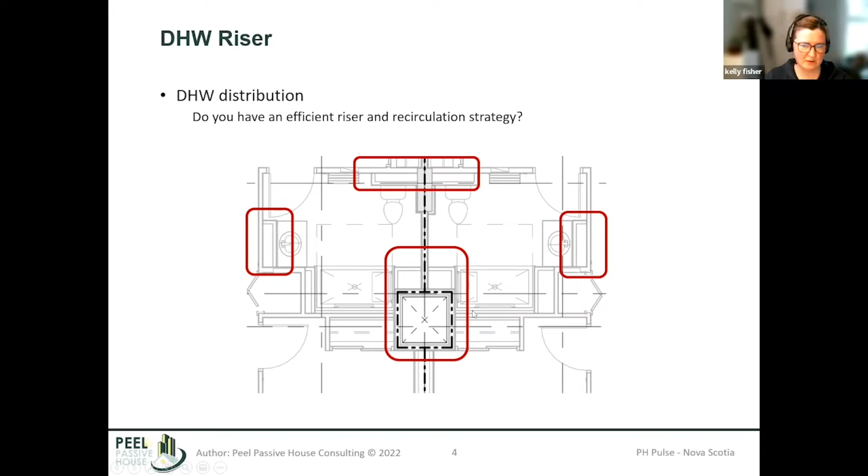There are a lot more things we can do when it comes to efficiency, so we often talk about efficiency in design. Here's a view of a quick SketchUp model I made that shows how we can further improve this - here's an example where we've got suites back to back.

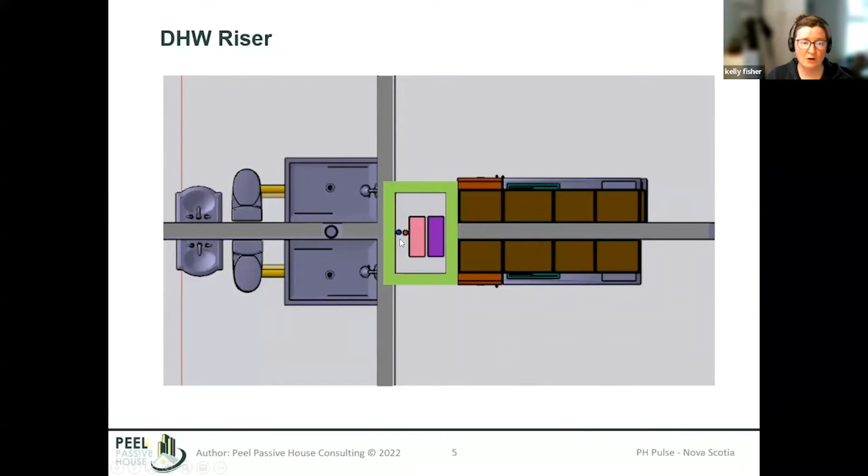We've got a kitchen on each side, a washroom on each side, showers and lavatories, and in the center we've got a shaft. In this mechanical shaft we can do our main distribution - distribution for ventilation and for domestic hot water. When we look at how that could look floor to floor, we can really optimize our distribution network and have far fewer pipes.

When you're looking at ways to save energy, in a passive house we know your space heating demand gets a lot lower. The next energy sink we find is domestic hot water - you've got a lot of pipe heat losses through your distribution system, a whole variety of different things we can look at for efficiencies.

One way we can do this is clustering the systems together to limit the risers in our design. In this example we saw the floor plan back-to-back suites, but we can also stack them vertically. This allows us to simplify our approach and have one hot water riser, for example, that services 8 suites in this situation, which would be a lot more efficient system.

We could save on heat losses, we could save on watts per suite if you wanted to factor that into your domestic hot water load. So there's a lot you can do early on in the design of a project that really helps amplify those efficiencies later on in design if you're tight.

Often as the project progresses, your available energy for certification or even your space heating demand targets, you get less and less buffer as you go through design. So trying to look at it foundationally and fundamentally from the start is incumbent on the designer - to see if there are ways to cluster things together, group things together, limit your pipe lengths, and do some analysis in the PHPP to determine which works better from an energy standpoint, and also coordination and collaboration with your mechanical engineer.

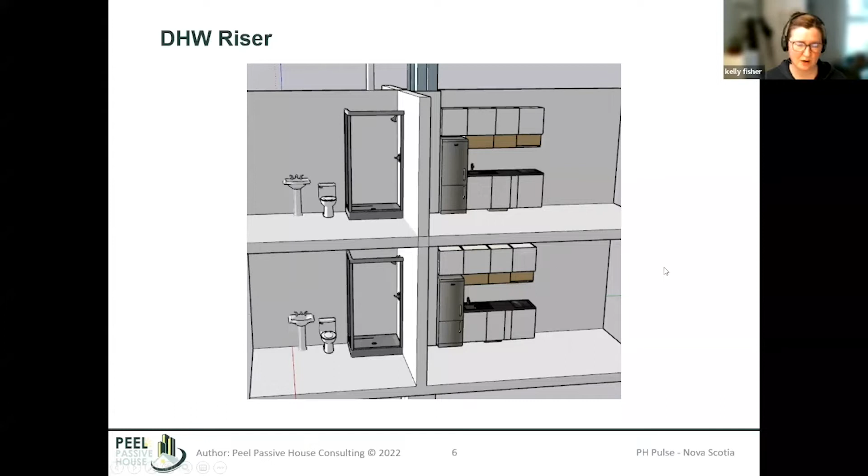Second to that, when we're talking about domestic hot water, is the quality of your pipe supports. We all know the setting, most of you should know the setting if you've got some passive house experience, especially dealing with the PHPP, the passive house planning package. Sorry, I've been on the phone all day, my words are a bit hard.

One setting that can be a bit of a sink when you're looking from an energy standpoint is the quality of your mountings.

This is a really easy detail to include in your drawing pack, making sure that you've got good connections, not none or moderate, but good. This is often overlooked on some projects, or trades on site may not realize it's a requirement. Following through and ensuring good connections on your mountings and suspensions helps you avoid incurring additional heat losses or thermal breaches through the system.

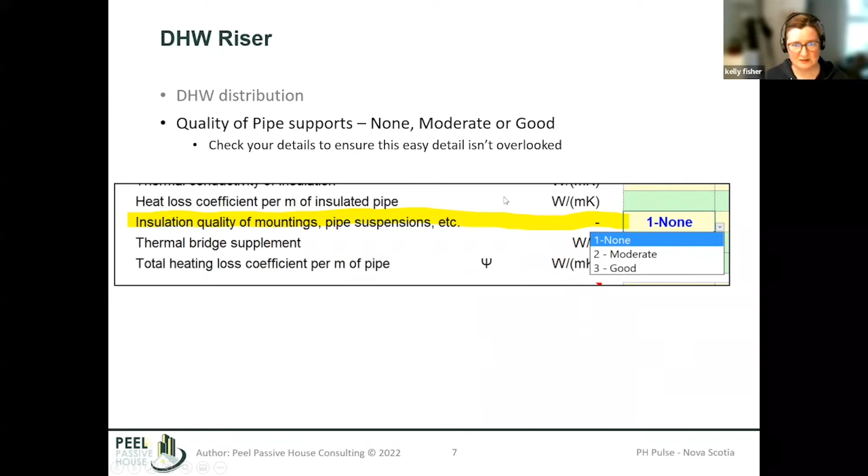One of the more important things I learned when I joined Peel Passive House was the concept of time to tap. If you turn on your hot water in your bathroom or kitchen, how long does it take for water to come out of your faucet? If the answer is a minute or two, you're wasting water until you get hot water. This is an assessment we do to optimize our design, looking at where our connection points are within our suites, how that impacts the time it takes for hot water to reach the furthest faucet, and even the flow rates of these fixtures to further optimize consumption.

If somebody has to turn a shower or tub on and let it warm up, they're going to walk away and forget about it. That's a huge concern both from a water conservation standpoint and an energy standpoint - we're literally throwing heat down the drain in this scenario. This is a concept that's really great in my mind and should be included in a lot of these projects, so we can limit our consumption and decrease energy consumption with respect to heating hot water.

There's a lot of great information available for this. We worked with a gentleman out of California, Gary Klein, who really helped us better understand the process and the math behind it to further improve our designs. Generally for domestic hot water, these three items are really key concepts that can help reduce your consumption and improve your optimization and efficiencies with your design.

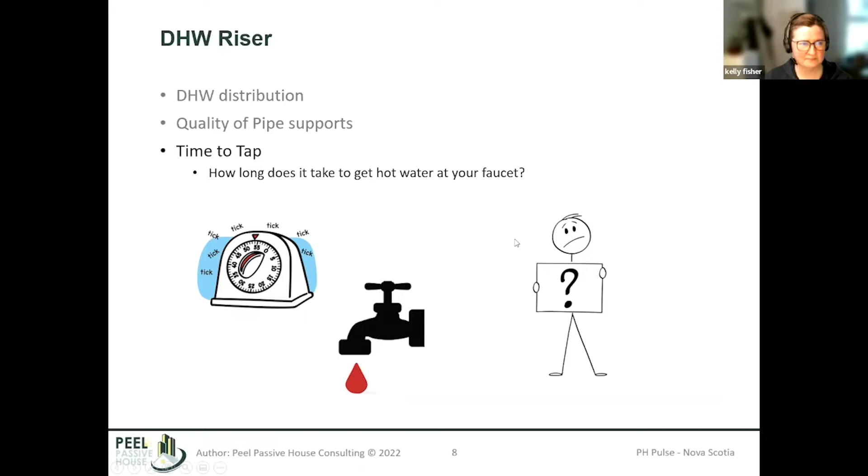Now I'm going to move into ventilation. I'm just touching quickly on some of these things as we go through, just to make sure the concept is out there generally. We can get into some discussion as I finish out the presentation.

With ventilation, when we get into these multifamily buildings, we move into the larger of the two ventilation worksheets in the PHPP - the additional ventilation worksheet, as opposed to just the ventilation worksheet. This requires a much more thorough input on how we're ventilating each room. Oftentimes there's disparity between what we as passive house designers think the ventilation requirements need to be and what your mechanical engineer thinks they need to be. Getting this sorted out early in the process will help you nail down efficiencies and your heating load calculations, or what your space heating targets should be rounded out to.

This is a very important thing for any passive house consultant working on a large multifamily building - to make sure you've got this coordination with the ventilation flow rates. It's a huge part of the energy calculations.

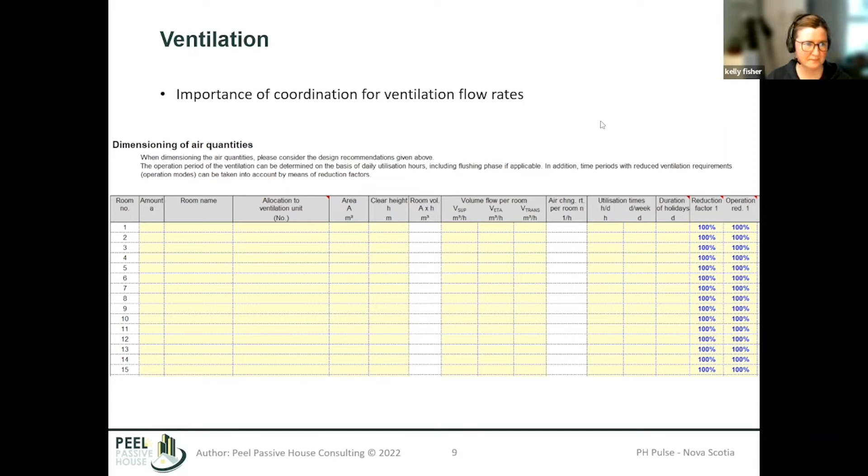Touching on that a bit, when we get into large buildings, maybe not as large as this one, we're moving away from individual ERVs. In single family homes you've got much smaller systems and units. We often see a similar approach in large multifamily homes, where every suite has its own dedicated ERV. But another alternative is centralized or semi-centralized ERVs or HRVs - systems where you've got ductwork throughout your whole building, supplying fresh air everywhere, from one to maybe even six units, depending on how big your building is.

There's a lot more efficiencies with this option, with respect to the integrity of your air barrier, and even some design options that you would have available. You could even look at supply air heating or supply air cooling for your buildings to save further use of equipment within the suites and reduce your maintenance. So there's a lot of different avenues for optimization and efficiencies, both from an energy standpoint and a cost standpoint.

When we're looking at passive houses for multifamily buildings, cost is always a driver. So trying to do your value engineering as you're designing, and being aware of what you're proposing or what your design is going to include, is really important to help the client and homeowner, or whoever's running the building, survive those upfront costs and that capital cost. Doing your due diligence and being aware of the different systems and configurations available is really going to help you along the way.

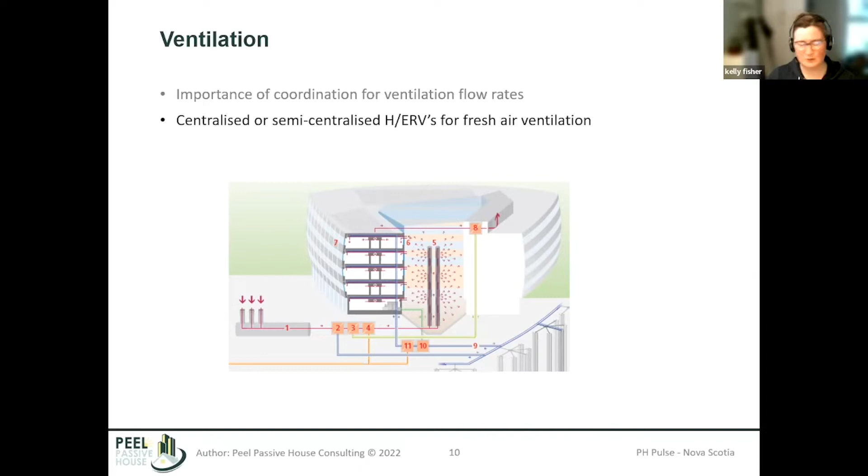And lastly, one thing that is very important in these larger buildings is the air tightness of your ducts. This is often something that's value engineered out because Aerosealing is quite an endeavor, but it really helps the efficiencies of these systems. I've had a couple of projects where duct sealing was value engineered out, and now we're having issues with leakage in the ductwork, where everything's filled up and covered, making it hard to find those leaks. So specifying this on your projects is really important for large projects.

The typical and conventional means of connecting and sealing ductwork is not going to give you the air tightness you need in these systems to ensure the efficiency of the ERV. Making sure you factor this in and specify duct sealing, and even pressure testing of the system and duct network, is really going to help with commissioning at the end, and save you a lot of hurdles and pressure once the building's occupied. This is a huge part of the ventilation system, and it's always an issue that gets run into on a lot of projects. So getting ahead of the game with this is really going to help you.

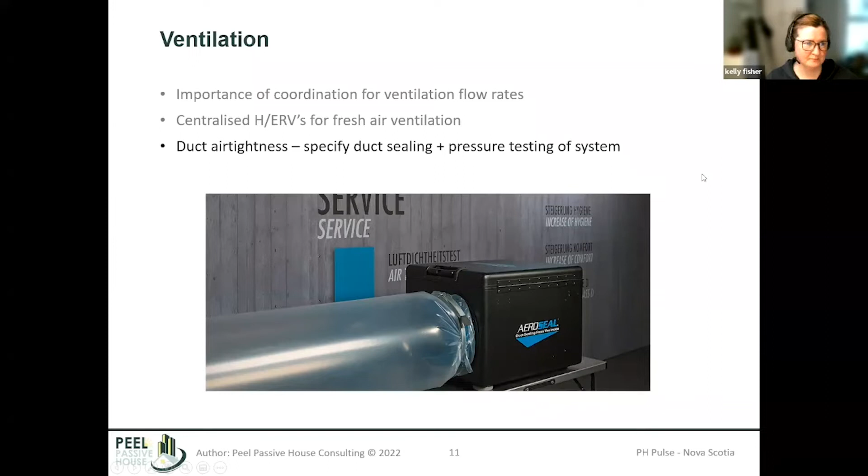And now I'm going to quickly touch on some lighting controls and some electricity inputs.

Lighting is one of the areas in multifamily buildings that you often may not think is going to be as much of a load as it is. But when we're looking at passive house projects and residential buildings, we have to factor in a lot of the areas that are outside of suites. The PHPP takes what's inside the suite and we can assign a lighting ratio for that, but when we look at how the lighting control strategy works outside of those suites, we have to account for all that lighting too. So if you've got a corridor that's lit 24/7 with really poor halogen or incandescent bulbs lighting that space, that's a huge energy sink over the course of your year.

So what we like to do for our projects is look at what options we have available, both for the light fixtures from an LED standpoint, and also lighting control strategies. If there's a way we can reduce the lighting load in a 24/7 corridor, we're going to try to find that, because that's really going to help us for our energy at the end of the game.

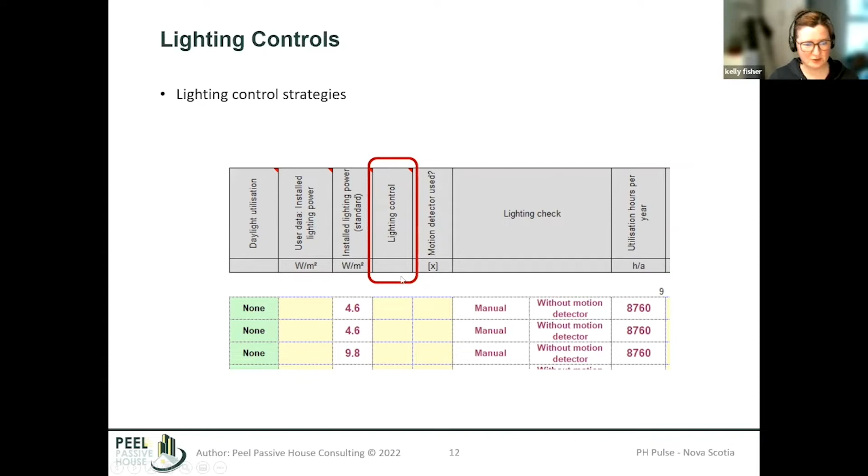So in the PHPP, this is the electrical worksheet near the end in the green sheets, and the lighting control input here. This alludes to how you're going to control your lighting. Is it going to be manual, automatic? Is it going to be by a bus system?

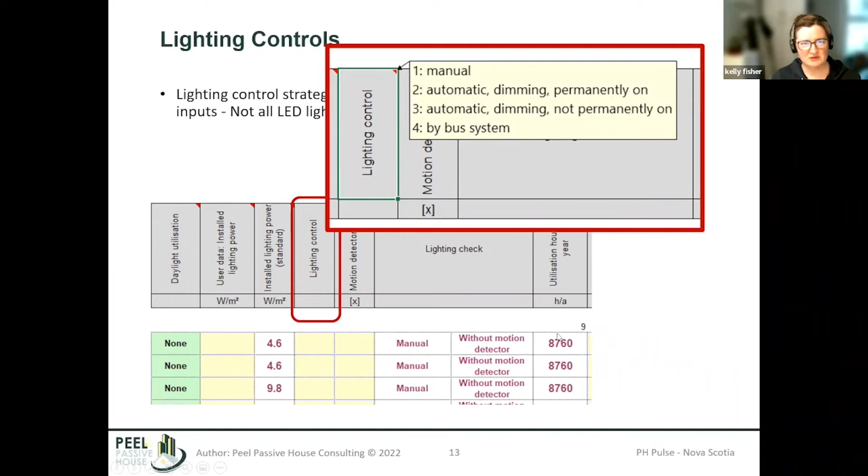When I first started looking at the PHPP a few years ago, I was like, what does this even mean? So I did some due diligence and figured out how to put it into more layman's terms. If you're manual, it's a switch on the wall like we have in our houses - it's user control. If you're always on, or these two settings here, they're more referring to daylighting, where systems offset or dim when there's sufficient daylighting available, which also really reduces our lighting load. And then the fourth option is by bus system.

So this would be BAS, or a lighting controls strategy. You've got no user interaction, and it's fully automatic. Depending on which one of these systems best aligns with your lighting control strategy, it can really help reduce the energy consumption you've got just from the lighting. And when we're in these multifamily buildings, every single area outside the suites, we have to account for this. So it does add up over time and over the course of the building.

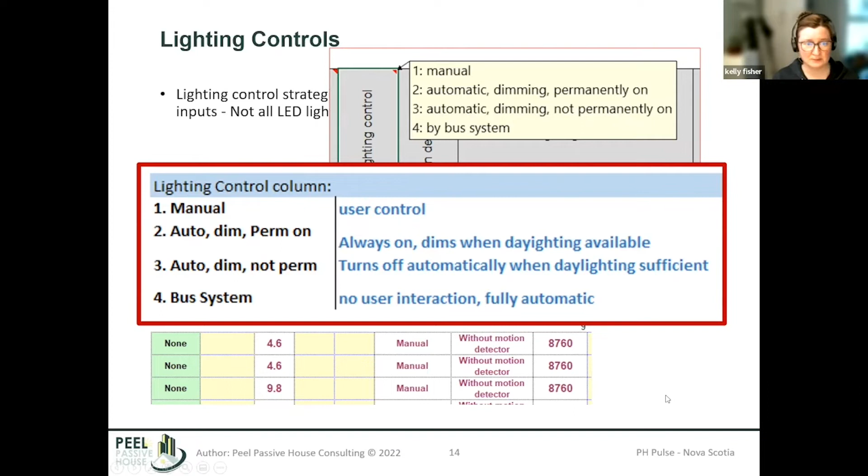And here's, you can kind of see with some corridor lighting here. Typically it's a 24/7 requirement by code to have this space illuminated.

Here are some typical inputs from PHPP. When we do our own lighting power density calculations from our lighting design, we can often lower these inputs. You can have more efficient lighting, you can have different control strategies, and it can really increase your efficiency and decrease your consumption. So working with your electrical engineer on the project to ensure that your lighting selection, or even with your architect, your interior designer, whoever's doing your lighting selection, it doesn't always have to be the engineers, making sure that you're getting the most efficient.

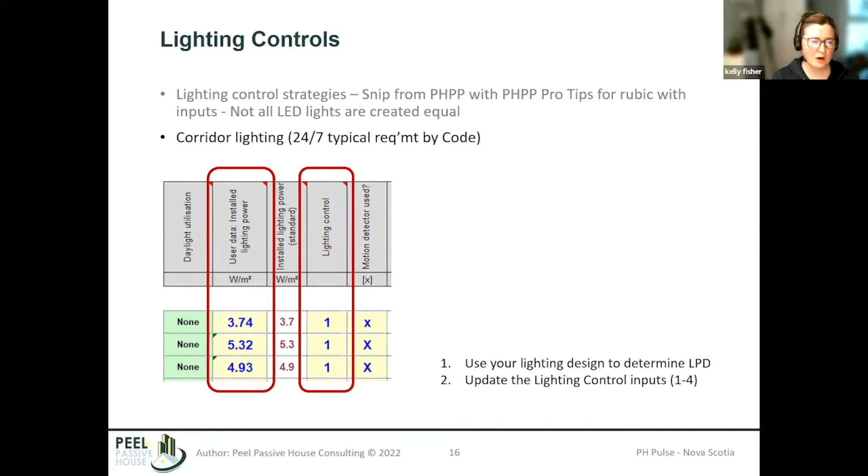Because not all pot lights are going to give you, not all LED pot lights are going to be a low wattage. You might have to do a bit more due diligence to kind of get there and find out what product will work best for your project.

So making sure that you look a bit more closely at what these components are and what their electrical draw is. And a bit more on some of the other equipment in a multifamily project that you might not consider, having worked with single family homes, for example. Elevators, you need to consider the electrical consumption from elevators.

And pumps. When you get into these larger projects, 5, 10, 15 stories, it becomes a game of consumption. Pumps are always going to be more than you think. Getting information on the pumps from your mechanical engineer or what have you, and understanding how they're going to be working and when they're going to be working is going to be really important to see, maybe there's another option or an optimization that can be employed if it becomes a bit of a situation with the energy results.

And lastly, we talked about this a little bit on the last slide. All of the areas outside of suites, you have to account the energy for. So these are inputs that are often maybe not considered or not really fully understood when it comes to these multifamily projects, that really do create a bit of an energy sink in these buildings that we have to look for ways to optimize and improve to make sure that we can meet our energy targets, and ultimately provide a building that is high performance, both with the envelope and with the building systems.

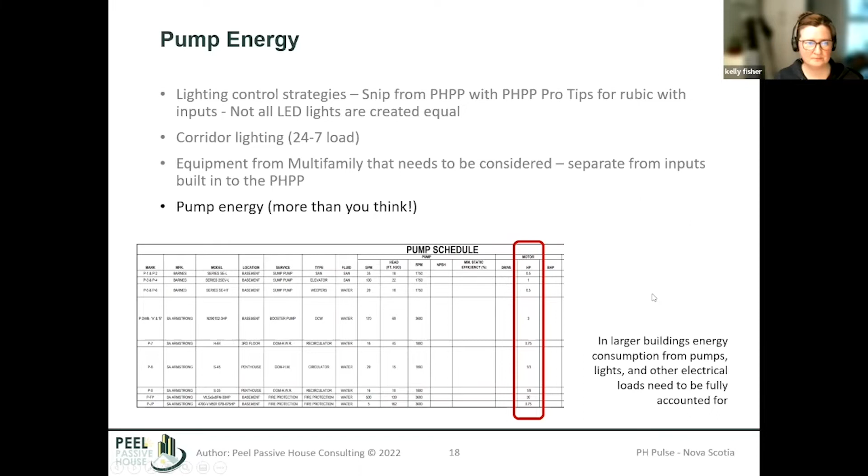And lifts or elevators. When we're looking at energy classifications for elevators, we obviously want the best efficiency we can get out of these systems, understanding the classification systems and where we fall in the North American market. We find from monitoring data that the efficiency classes stated aren't always what is actually seen in reality, so make sure that as a Passive House consultant and designer, you've got some leeway with the specifications from the architect or conveying consultant to ensure you can find the best efficiency possible.

The standby power, depending on the frequency of use, can really add up over the course of a year and can be impactful on your energy use. So making sure you do your due diligence and specify something that works from a budget standpoint, but also from an energy standpoint, will really help your project.

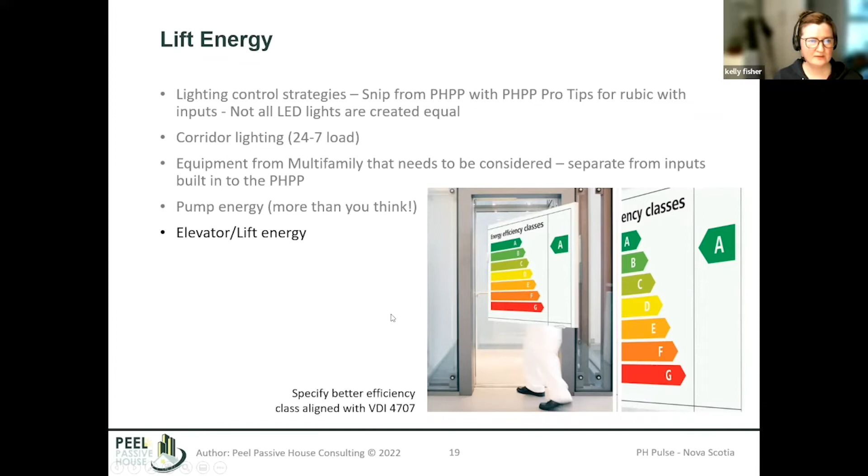So in summary, for multifamily buildings where we're looking for optimization, you need to look at all avenues for energy efficiency. It's not just envelope and windows - it's a holistic approach to the whole building. We look at domestic hot water, ventilation, electrical consumption, and also our envelope, windows, and thermal bridges, and everything like that.

We want to stress the coordination with the design team to ensure that at every step of the way the project is achieving the criteria needed for certification, and identifying any areas of risk that we see need to be improved upon or further optimized.

Just to note, if you're tight on meeting your energy criteria, depending on the nature of your project, you may be able to use the PHPP relaxation tool. This helps for residential buildings with high occupant density, so it could be an avenue to look into if you're tight on meeting these requirements. You typically have to reach out to a Passive House certifier to get this tool - it's not something you can download from Passipedia or anything like that.

A little bit of touch on specifications here because they are very, very important in these large projects. Project specs are what govern the hierarchy of what you can get on site. People think the drawings are it, but really it's the project specifications. These need to be clearly aligned with the requirements for Passive House, and everybody on the project needs to understand what the outcome is. You can easily write into these project specifications training requirements, mock-up requirements, air tightness, everything like that. Specs are very important in the construction world, but it's one of the areas of the industry that I think needs a lot of work and more coordination.